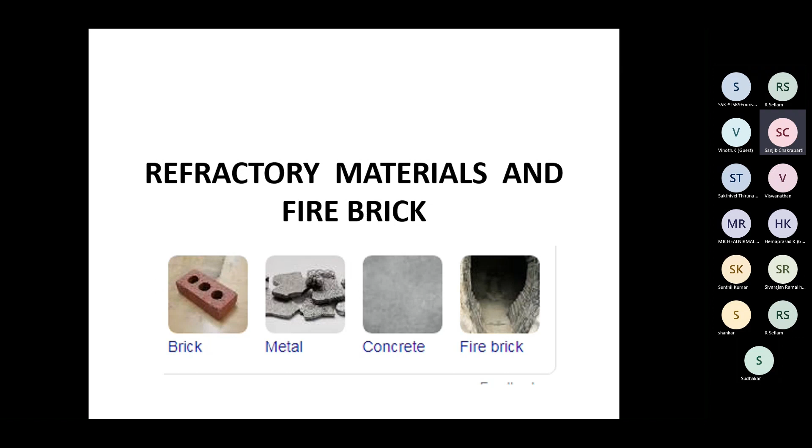So first, what are refractories and what are they used for? Refractory is a very hard material, used as a liner for chemical vessels, chemical process equipment, and furnaces. It is a very stable and particularly heat resistant material. When there is a heating furnace, you cover up the heat, you don't allow the heat to go away, so you don't waste the heat. It is chemically a very stable compound, mechanically hard, and very non-reactive to heat, chemical activity, chemical corrosion and erosion.

So it is basically a heat resistant and chemically resistant material, with certain features: low thermal conductivity and low electrical conductivity. The materials are mostly oxides, carbides, and nitrides of silicon, aluminum, magnesium, calcium, boron, chromium, and zirconium. These are some rare materials, and we are lucky that India has an abundance of them in the earth's crust, so we can extract them. These raw materials are minerals, and we process and use them.

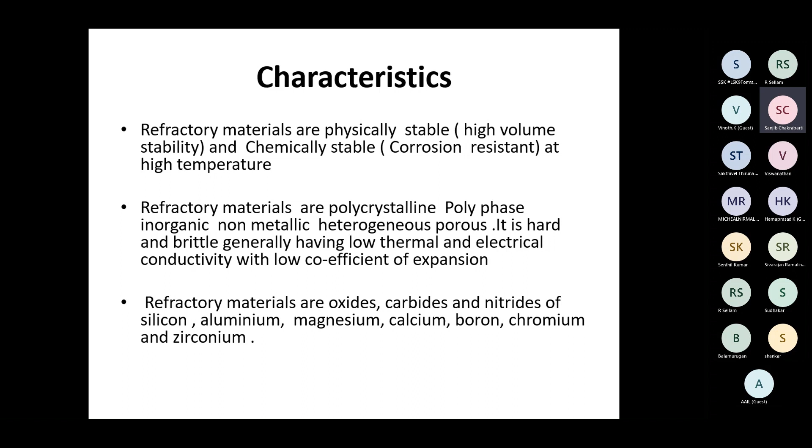So the use of refractory, just to elaborate. It is an insulating heating system. It insulates the heating system so that the heat is contained in the process and best utilized. It is used in all metallurgical processes, furnaces, kilns, reactors, even in the petrochemical industry, in the thermal industry, in your power sector also. It has very wide applications, of different kinds of variety.

And refractory is also used as a support system to the structure; normally it stops the heat being conveyed from the process to the structures and your environment. So it is called the insulating system. It is a kind of insulation to the other parts of the structure.

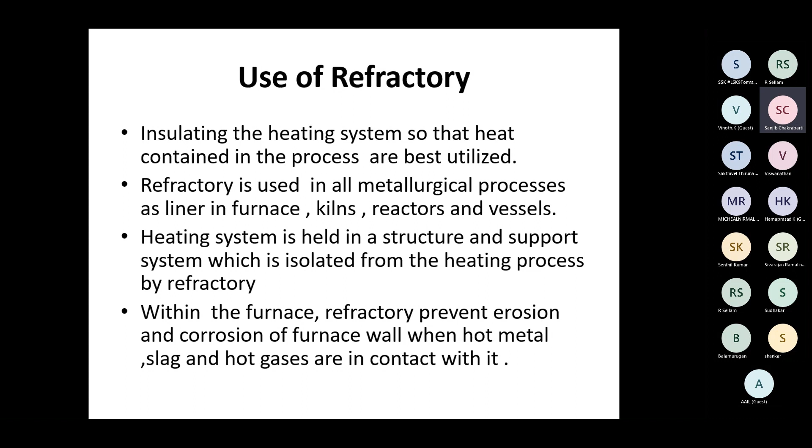So furnace refractory prevents corrosion and erosion within the furnace. Inside the furnace, say for a blast furnace or any cupola, the refractory is the layer which prevents corrosion and erosion of the furnace wall when the hot metal and slag are in contact with it. How is it characterized? The refractory materials are physically very stable, as I told you, and have high volume stability.

Use of refractory: the insulating, and other uses like heating elements. Conducting refractory is used for heating elements. Silicon carbide and tungsten are the heating elements in other chemical processes like the hydrogen reformer, ammonia primary and secondary reformer, cracking furnaces, catalytic cracking heaters, utility boilers, like this.

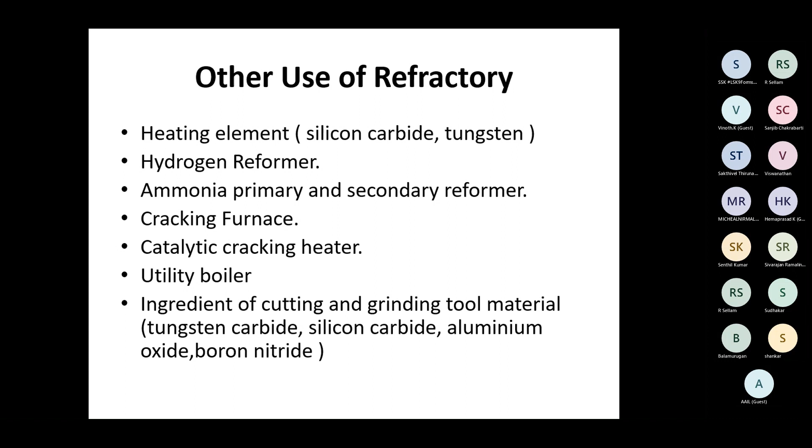So, the shape and size of a brick. There are different kinds of shapes and sizes of the brick. This is the formal shape, the standard shape, as per the American Society for Testing and Materials, your ASTM. These are the sizes: the straight refractory, arch refractory, wedge, key. These are the standard shapes.

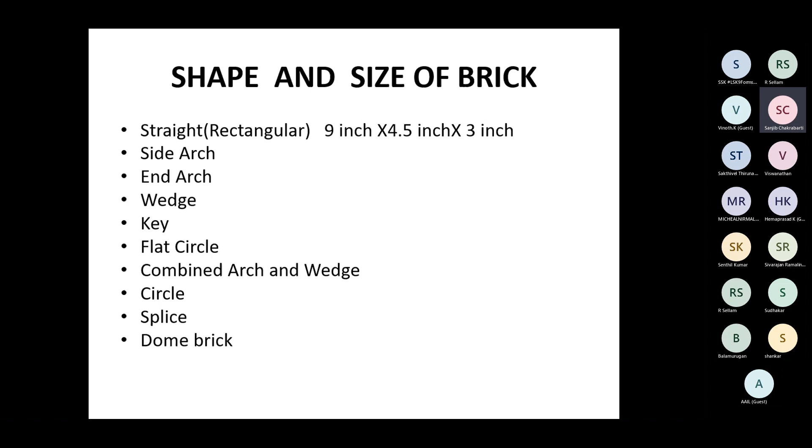Some of the standard shapes are like this. These are available, and these are molded products. They are not cut. These are molded products, and since refractory is a ceramic material, it's in a powdery form. You have to make it from powder by grinding. Different ingredients in the form of powders are mixed and molded.

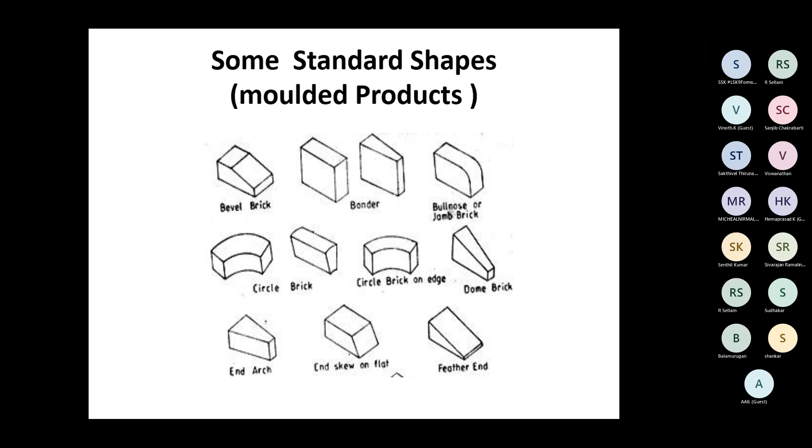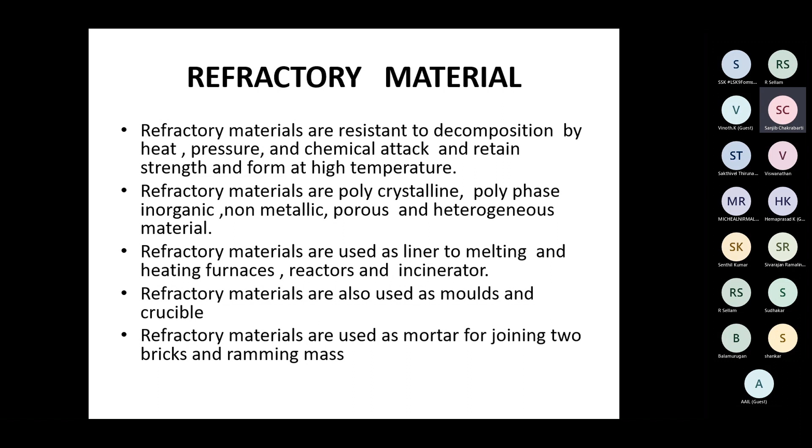Refractory materials are also used for liners of melting and heating furnaces, as I already told you, reactors, incinerators. Refractory materials are also used for molds and crucibles, or even glass and metal casting. Sometimes the material is a conducting refractory. We call them conducting refractories. We use carbide molds, your silicon carbides, graphite crucibles, silicon carbide molds, heating elements like this. These are the different kinds of usage other than lining material.

It is also used as a mortar, like in your construction work, like the plaster. We have to do the plastering, and mortar is used in joining two bricks. When we lay the bricks, it's used as a mortar, and that mortar is also a refractory material, ramming mass, etc.

So, what are the constituents? The natural refractory materials, like silica, are available in our earth's crust. You can get them in the earth's crust by digging to a level of 5-6 meters or 10 meters. Silica, alumina, fire clay, dolomite, bauxite, chromite, magnesite, zircon. These are all available, and India is quite rich in these materials.

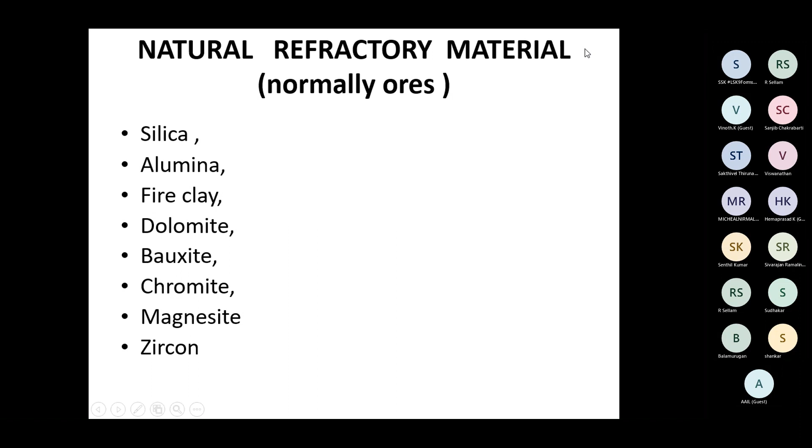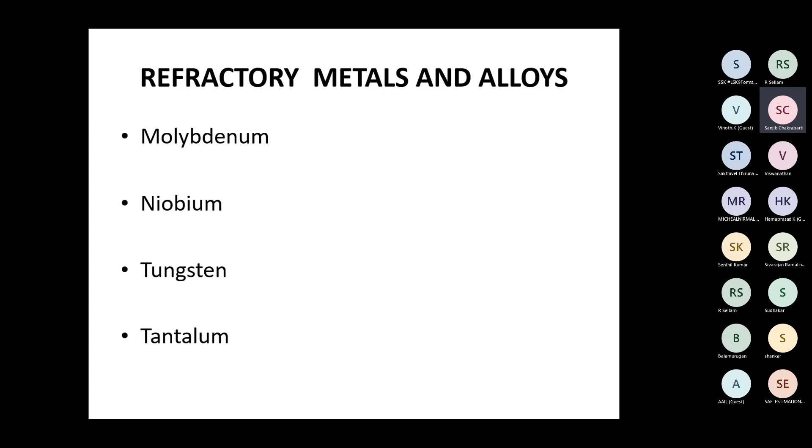And we have refractory metals and alloys, as I told you: molybdenum, niobium, tungsten, and tantalum. These metals conduct heat. But as refractories, they have very high heat resistance. These materials don't melt much; their melting point is quite high. So that is why it is a refractory material, but it conducts heat.

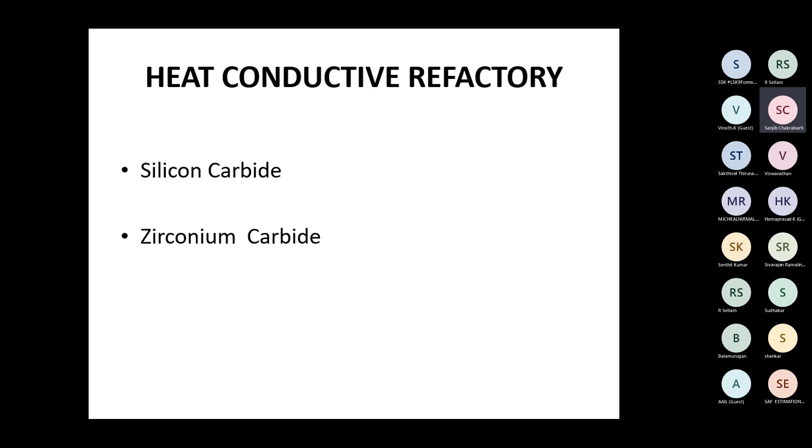These are the heat conductive refractories, as I told you, silicon carbide and zirconium carbide. And these are used quite heavily in high melting point situations. But the only constraint is that you cannot use any oxygen. Any oxygen cannot be used; you cannot allow the oxygen to pass in here.

So high temperature refractory, binary, ternary refractory. This is a high temperature refractory. Binary compounds such as tungsten carbide, boron nitride, hafnium carbide, a binary compound having a very high melting point, 3890 degrees centigrade. Ternary compounds such as tantalum hafnium carbide have one of the highest melting points, 4215 degrees centigrade.

Mind that these refractories are used in many ways in the space shuttle, spacecraft, the launching pad, where we have very high heat generation. Deflectors in the launching pad, where the gases are coming out. These are the deflectors that are used.

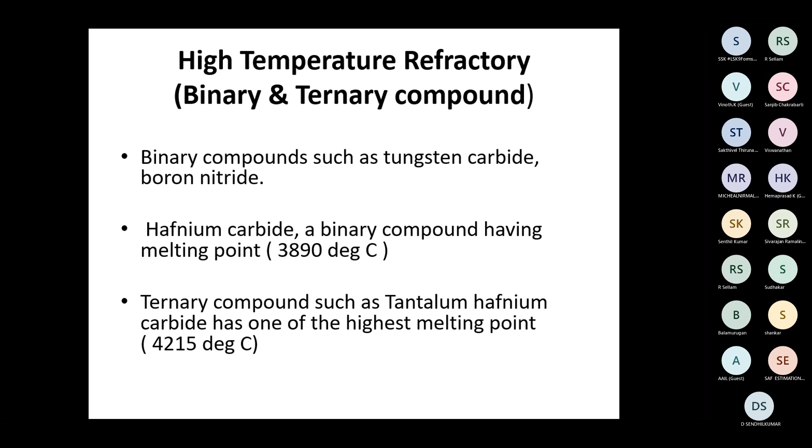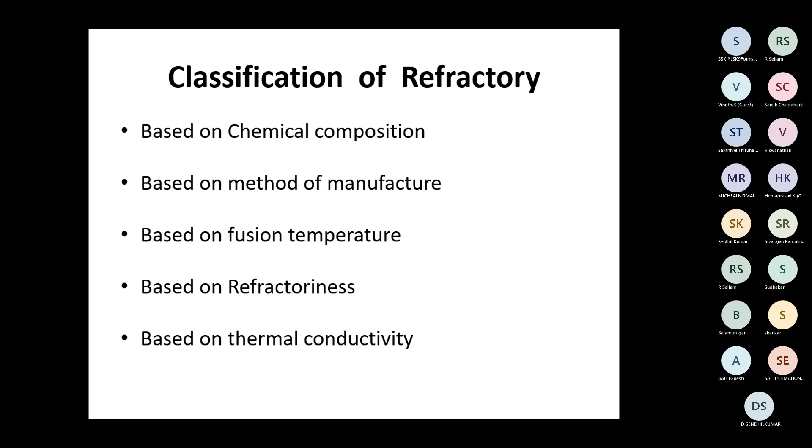So, classification of refractories. Refractories are classified on the basis of the following: chemical composition, method of manufacture, fusion temperature, refractoriness, and thermal conductivity. These are all the attributes for being a refractory material. And the classifications are as follows. First, we go to the chemical composition.

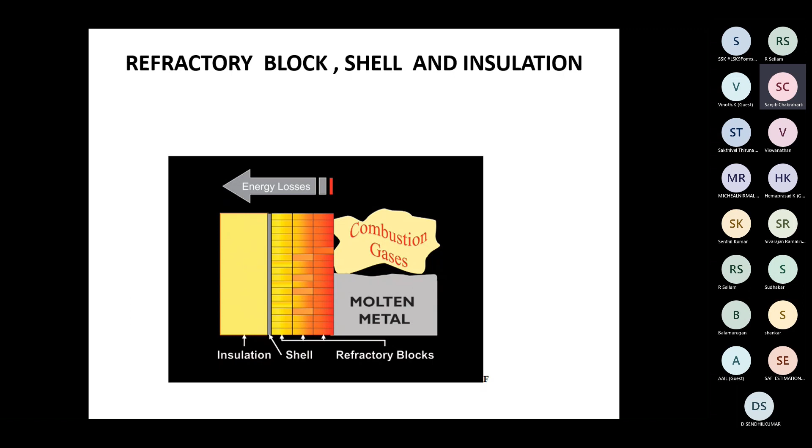Refractories based on chemical composition. There are types of refractories: acid refractory, basic refractory, and neutral refractory. The first is the acid refractory. Acid refractory is acidic in nature, and this refractory material reacts with or attacks the basic slag. When there is molten metal, slag floats on top of the surface.

So the basicity or acidity of the slag has to be determined before selecting the refractories. If you use the acid refractory, then you cannot use the basic slag. Or in a process where basic slag is generated, you cannot use the acid refractory. So you have to be very careful while selecting the refractory.

So what are the acid refractories? I am defining them here. The super duty refractory bricks: the lining of aluminium melting furnaces, rotary kilns, blast furnaces, hot metal transfer ladles. These are the super duty fire clay bricks. These are all acidic bricks.

And high duty fire clay bricks, I will explain. What are the high duty bricks? What are the super duty? The lining of cement and lime kilns, blast furnaces, incinerators.

Third is the high alumina bricks: boiler furnaces, spent acid regenerating furnaces, phosphate furnaces, glass tank refiners, carbon black furnaces, continuous casting tundish, we call it the concast machine, coal gasification reactor linings, and petroleum coke.

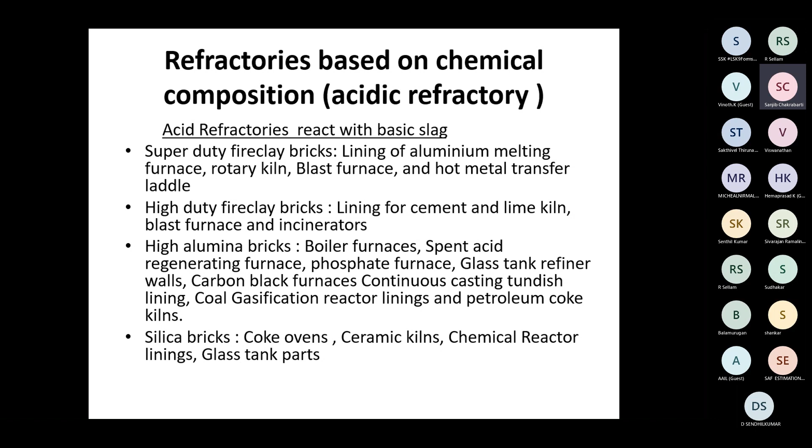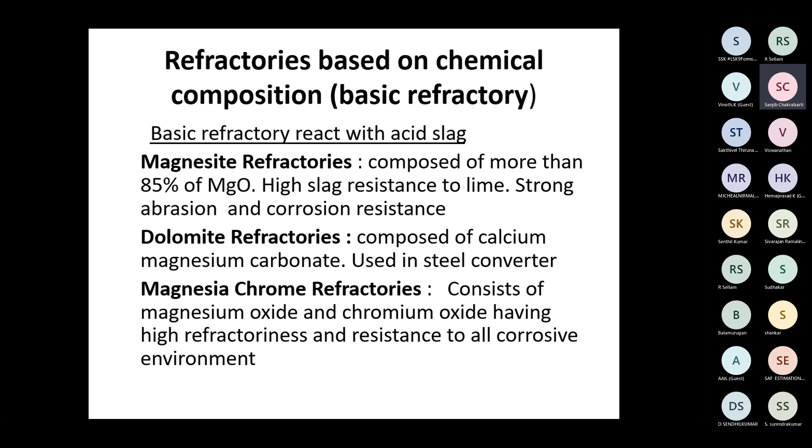Dolomite refractories are used quite considerably, and in aluminium extraction or aluminium melting these bricks are quite used. It's a costly brick, so it has strong abrasion and corrosion resistance, apart from the temperature. So these are the chromite and magnesite. There are other kinds of calcium bricks also.

Next is what we call the neutral refractory. This is the very peculiar nature of neutral refractory: they do not react; neither acidic nor basic slag attacks them.

The acidity of the slag or the basicity of the slag doesn't attack these refractories. And mainly, as an example, in your induction furnace we use the neutral refractories.

The carbon graphite refractories mainly work in reducing conditions. Mind that carbon graphite refractories are quite useful neutral refractories, but oxygen is the enemy of carbon graphite, because it will oxidize the carbon and the carbon dioxide will escape. All this will be jeopardized. So be very careful when you use carbon graphites. We have to use them in a reducing atmosphere.

Then chromite refractories, composed of sintered magnesia and chromia. They have constant volume at high temperature. This is a very good chromite refractory, a very costly refractory. The volume stability is very high for this refractory. Alumina refractories are composed of 50% alumina. High alumina refractory is not neutral. High alumina usually is an acidic refractory.

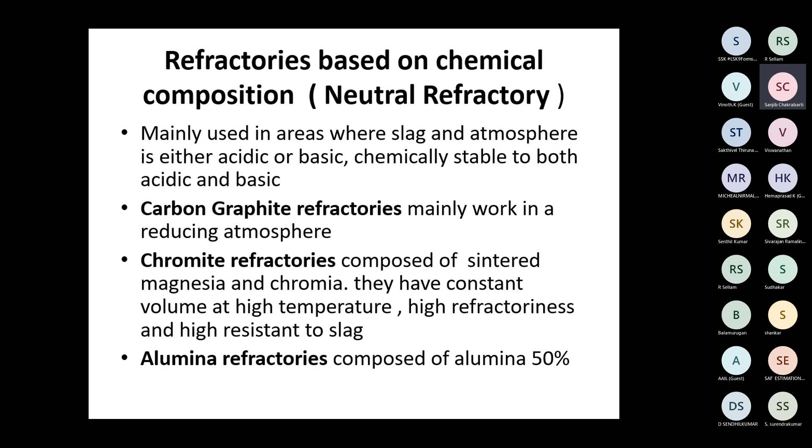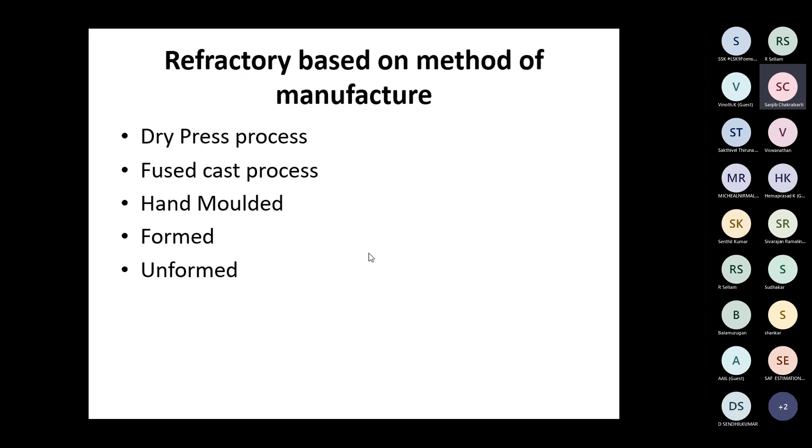And there's the fused cast process and molded process, formed, unformed. So there are different varieties. I'm not going into detail; we would need hours of lecture for them. I am switching to the next slide.

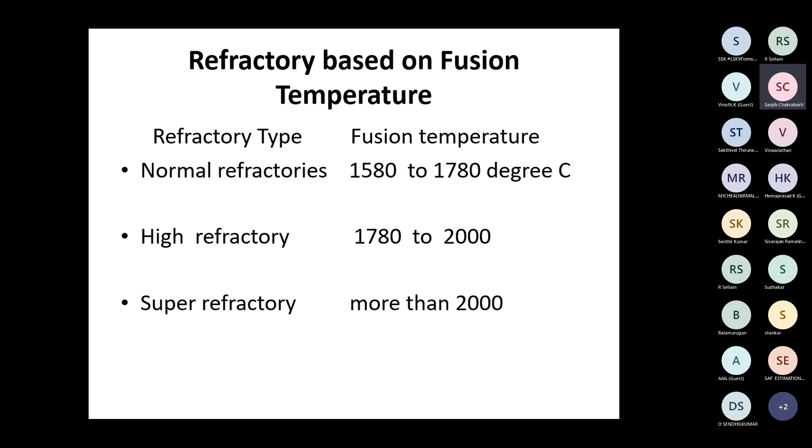Refractories based on fusion temperature. The normal refractories are 1580 to 1780. High refractories are 1780 to 2000. Super refractories, more than 2000. I will talk about these super refractories afterwards. Next is refractory properties. What are the refractory properties?

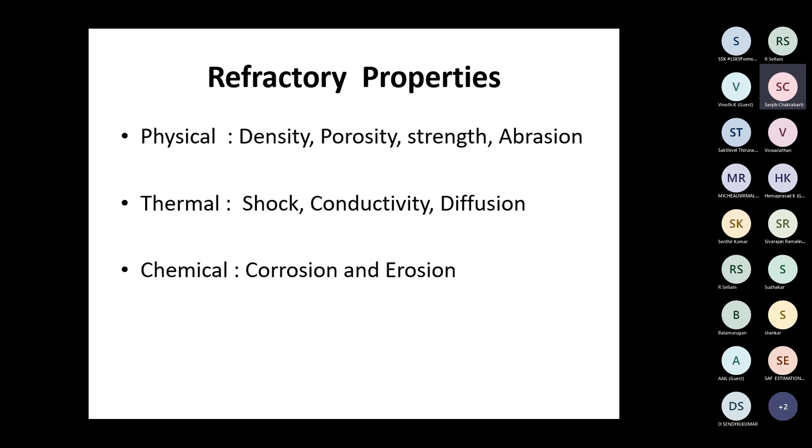The chemical composition is very important. Out of all properties, the most important are the corrosion and erosion properties. As I told you earlier, you have to prevent corrosion. When the hot metal is there, the hot slag should not corrode the refractory. So be very careful about the selection of the refractory vis-a-vis the hot metal and the slag used in the process.

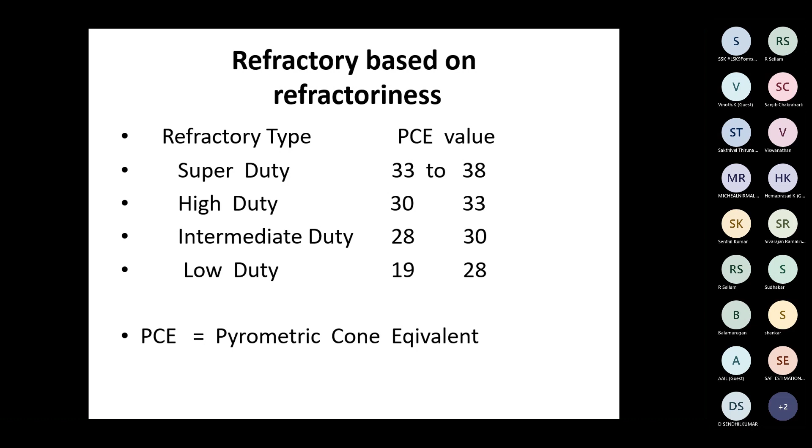Pyrometric cone: the thermal softening behavior of a refractory material is known as refractoriness, which is determined by the pyrometric cone equivalent, or PCE test. And it is done in a PCE furnace. PCE of a refractory material is about its ability to withstand elevated temperature without appreciable deformation. The PCE test compares ceramic specimens of known softening behavior, either in Orton or in Seger test.

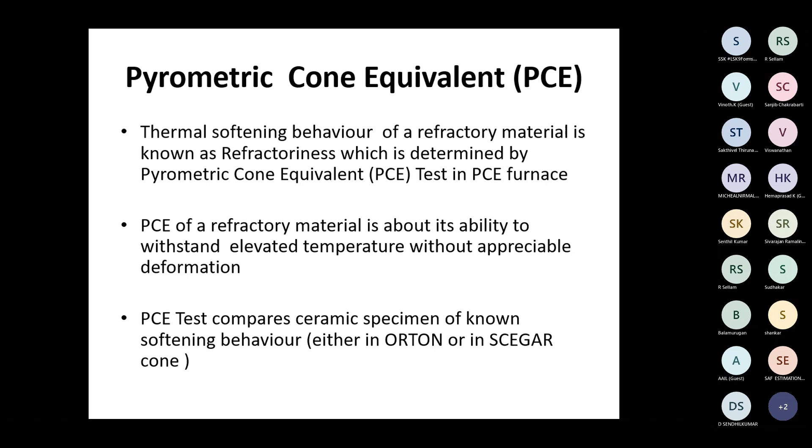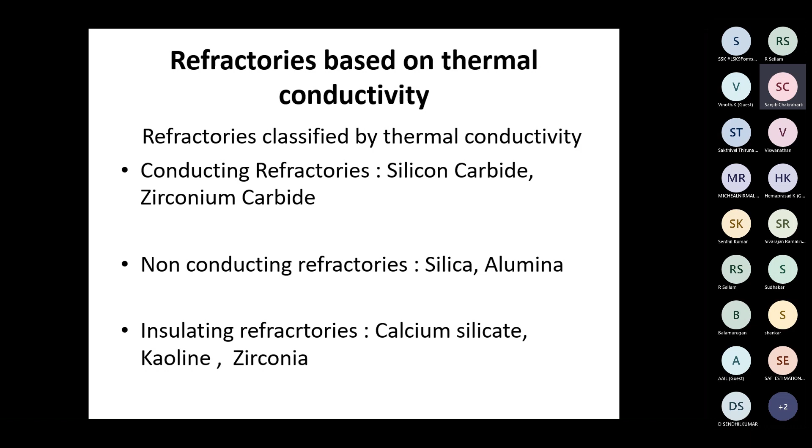Refractories based on thermal conductivity. The refractory is classified by thermal conductivity. Conducting refractory: silicon carbide, zirconium carbide is highly conductive refractory. Non-conducting refractory is silica and alumina. Insulating refractory is calcium silicate, kaolin, zirconia. Insulating is where the holes or the porosity is very high. Insulating refractory has to have quite good porosity, otherwise it will conduct.

Types of insulating refractory based on thermal conductivity. So the insulating refractory reduces the rate of heat loss through the furnace wall, which requires a high degree of porosity. Having a high degree of porosity, there are possibly 4 types. Heat resistant, with application temperature less than 1100. Refractory is less than 1400 degrees centigrade, high refractory less than 1700, ultra high refractory less than 2000.

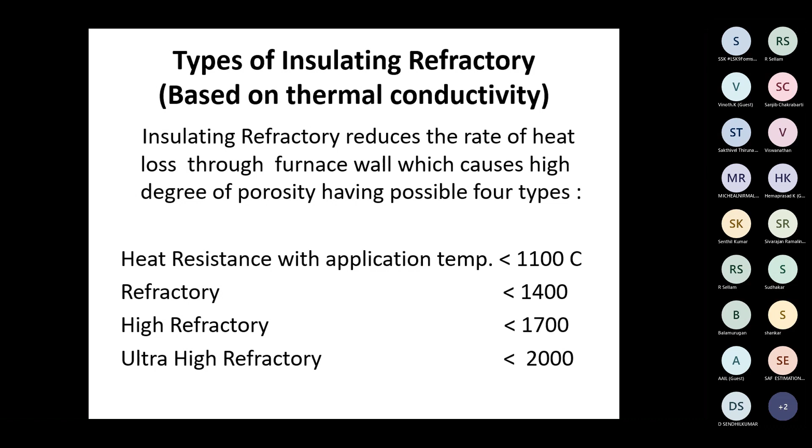So these are the broad types of refractory we handle in our engineering use, particularly the metal, iron and steel. Iron and steel use almost 70% of the refractory. Whatever I described, the iron and steel industry consumes 70%.

I was with RN Industries for many years in the steel plant, all these steel plants or mini steel plants or small refractory, particularly in the Odisha and Bihar area. I have seen a lot of applications. A lot of refractory units are there in Bihar. And Tata Refractory is a very good unit there at the Bihar Odisha border, and Jharkhand area. So these are all refractory. Almost 70% of this type of refractory is used in the steel industry.

So I just elaborate: fired refractory products, non-fired refractory products, special refractories, monolithic refractories, very useful, functional refractories, clay bricks, high alumina bricks, silica bricks, magnesite bricks, corundum bricks, ramming materials, plastic materials, casting materials. So these are all refractory materials. Whatever materials I have described earlier, the ingredients are from that.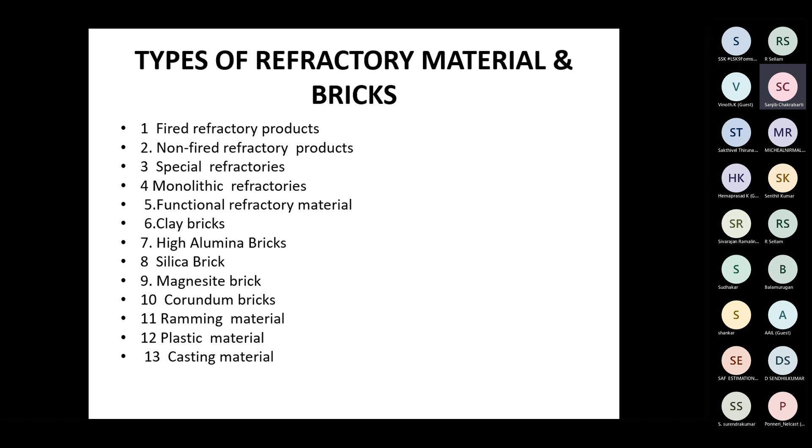Fired refractory is obtained by kneading, molding, drying, and high temperature firing of granular powder, raw materials, and binder. Fired refractory bricks are shaped. They are used in the wall, floor, and roof of a furnace. Whatever the furnace is, you have a wall, roof. These are shaped materials. They have a particular size, as I already showed you. The standard size is there. There are non-standard bricks, but non-standard bricks are very costly. You cannot afford them for your furnaces.

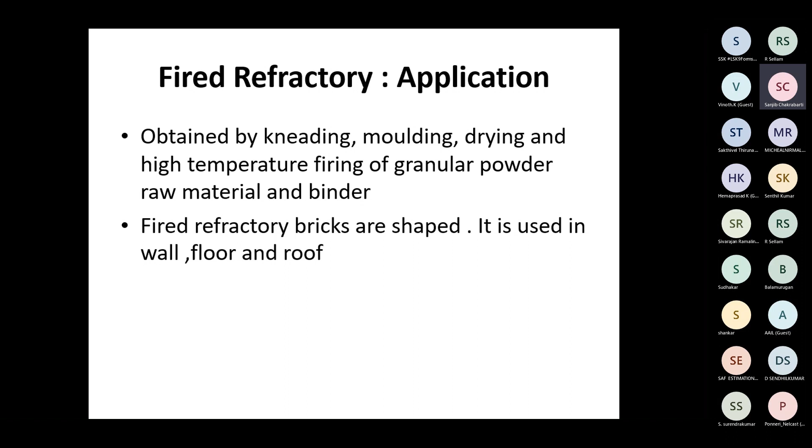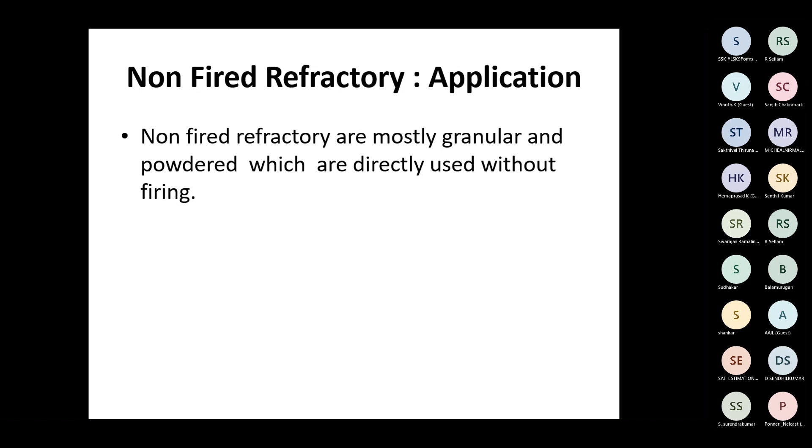Non-fired refractories are mostly granular and powdered, which are directly used without firing. Special refractories. Special refractory is a kind of refractory material with special features made of one or more high melting point oxides, refractory non-oxides, and carbon.

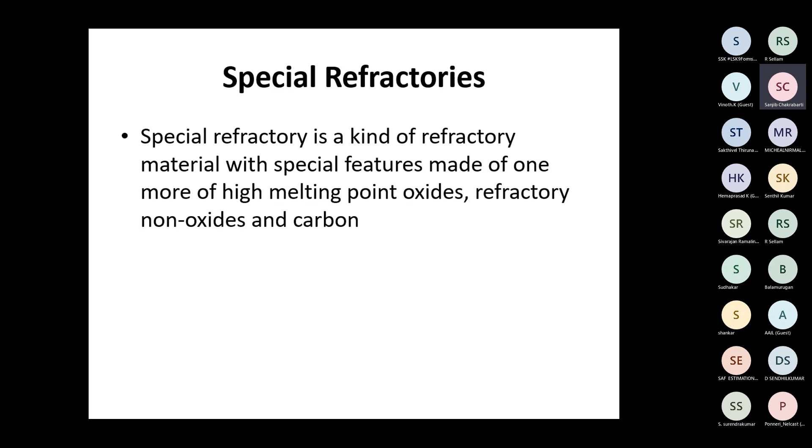Monolithic refractory is very useful. Monolithic refractory is a bulk refractory concrete, we call it, because in the industry a lot of unformed refractories are used. Monolithic refractories refer to refractory materials with a reasonable gradation of granular powder, refractory raw materials, binders and various admixtures that are not fired at high temperature and used directly after mixing, molding, and grilling. It is not fired, but grilled.

Like we grill our sandwich before eating. It is not fired. Then who does the firing? The furnace does the firing. The site does the firing itself. The process does the firing. So it gets its strength by firing inside the process, not before that.

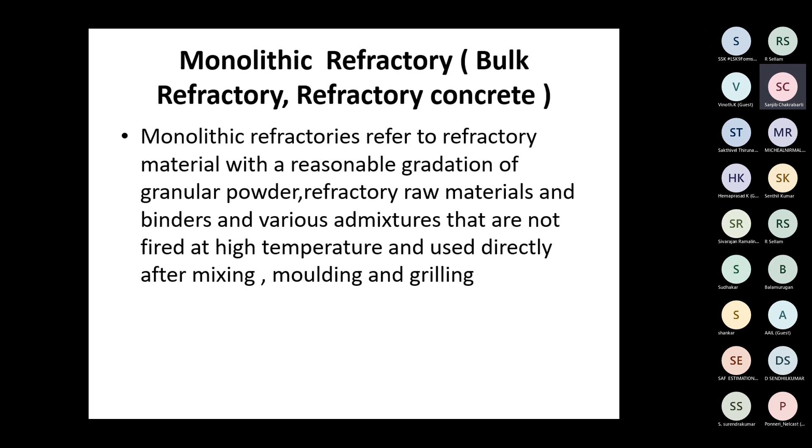The functional refractory is fired and non-fired refractory materials that are mixed with powdered and granulated refractory raw materials and binders to form a certain shape and have special melting applications. These are all functional refractories. You can do the refractory as per your functions. The use of refractory is as per your function, as the system or the process desires. So you can mix it, admix it, and do it.

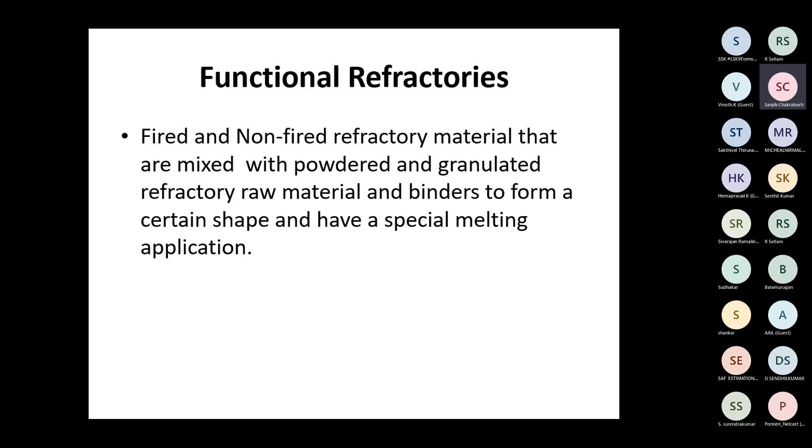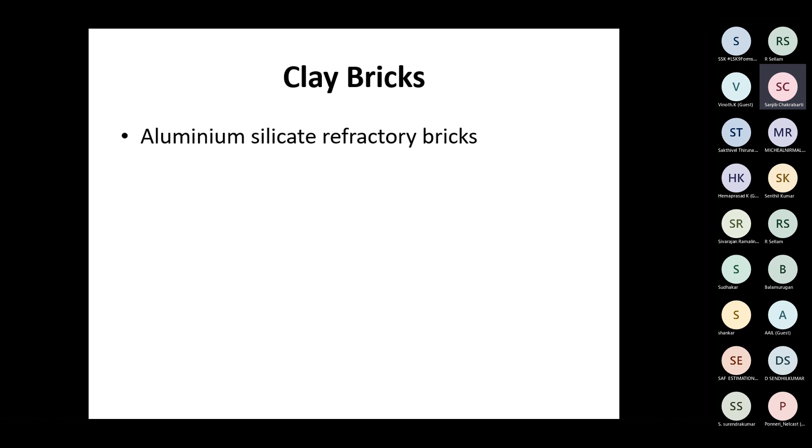The clay bricks are aluminum silicate refractory bricks, called clay bricks. I'll skip some things like high alumina bricks, silica bricks, magnesite bricks, corundum bricks, ramming material.

Types of industrial refractory material: acidic refractory material is different. You can have silica, fire clay, or high alumina. Your normal alumina bricks are neutral bricks, but high alumina bricks are acidic bricks.

High alumina bricks are costly bricks that can take quite high temperatures. They can resist high temperature with 50 to 99% alumina content.

Silica refractory brick is very commonly used. Fire clay refractory, like in a cupola, you can use quite a lot of fire clay refractory bricks. The basic refractories are magnesite brick, lime, and similar materials.

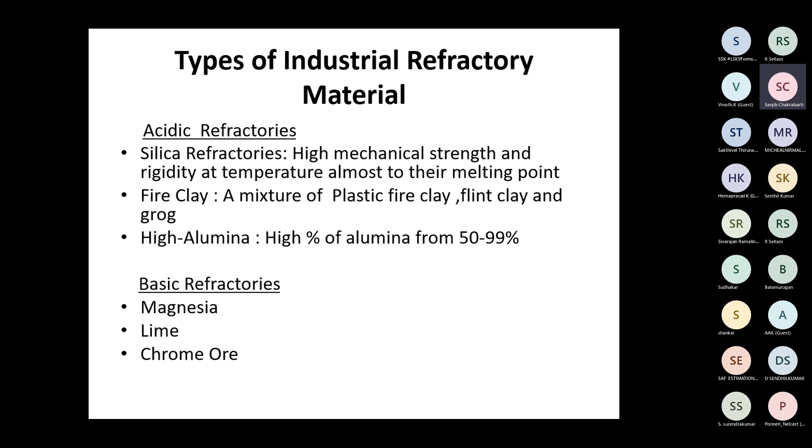The composition and application of some acidic refractory bricks - this shows the composition, the acid type. By changing the composition, changing the alumina percentage, you increase the high temperature resistance. You can classify high temperature alumina bricks by increasing the alumina percentage.

So it's a very costly brick. High alumina bricks are quite costly bricks.

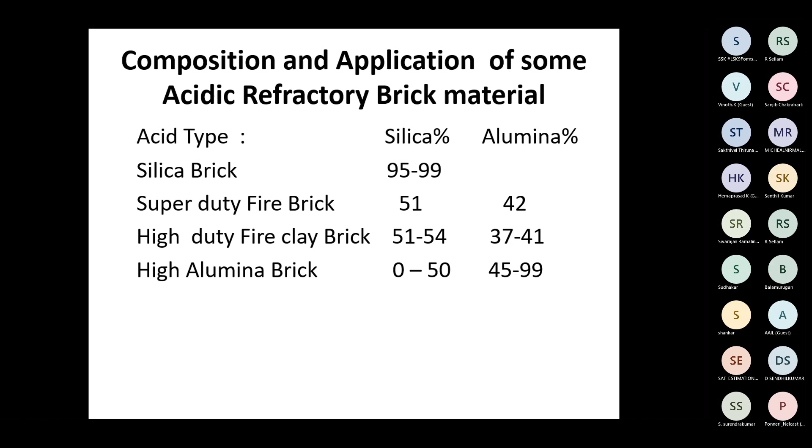Next is the use of refractory liner in iron and steel industries - refractory bricks and liners used in steel plants. This may not be of interest to all of you, maybe only 1-2 units or the foundrymen, but it's relevant to the overall iron industry because I cannot skip the coke oven.

Coke oven is the ingredient where you get the coke, which feeds your foundry. I cannot skip the blast furnace either - blast furnace gives the pig iron. We cannot eliminate the blast furnace. If you don't get pig iron, you cannot run your cupola. So these are all integrated.

Here you will find these are all real iron and steel industries, the bulk of this thing, and some other aspects as well.

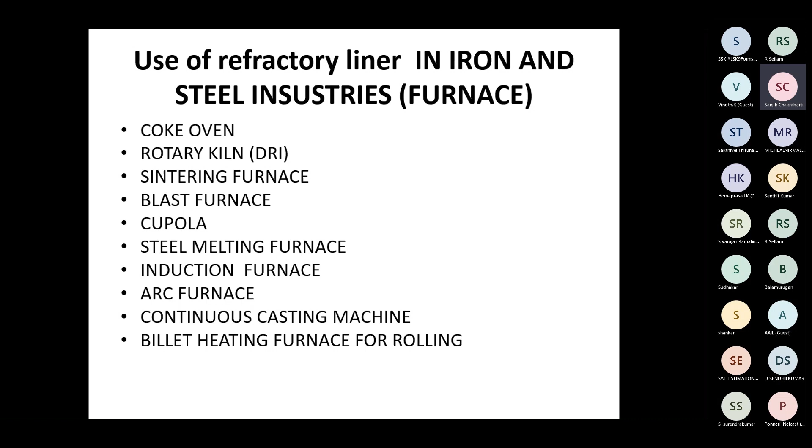Application of acidic refractory: super duty fire clay bricks - lining of these I already told you - used for aluminum melting furnace, rotary kiln, blast furnace. High duty fire clay bricks used for lining of ceramic, cement industries. Cement industry has quite a refractory requirement because of their rotary furnace, rotary kiln.

High alumina bricks used for boiler furnaces, spent acid regenerating furnace, phosphate glass tank refiner, carbon black furnaces, continuous casting, petroleum coke kilns, like silica bricks. Basic magnesite bricks, as I told you, and the basic oxygen furnace is a huge requirement of basic refractories for steel plants. Your basic oxygen process, BOF or BOP, basic oxygen furnace, we call these converters.

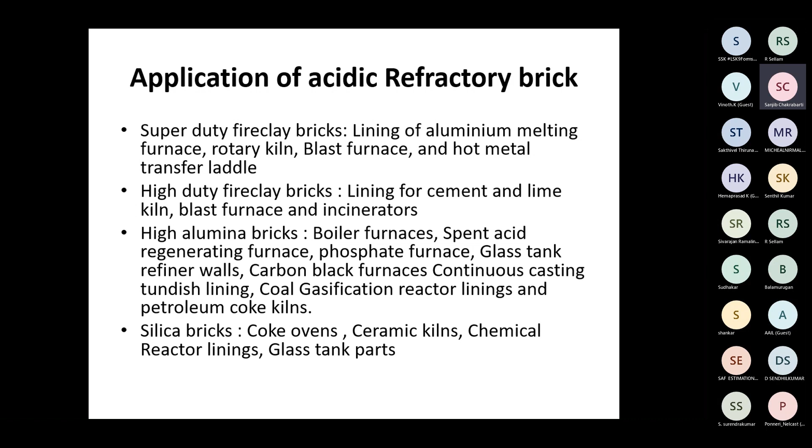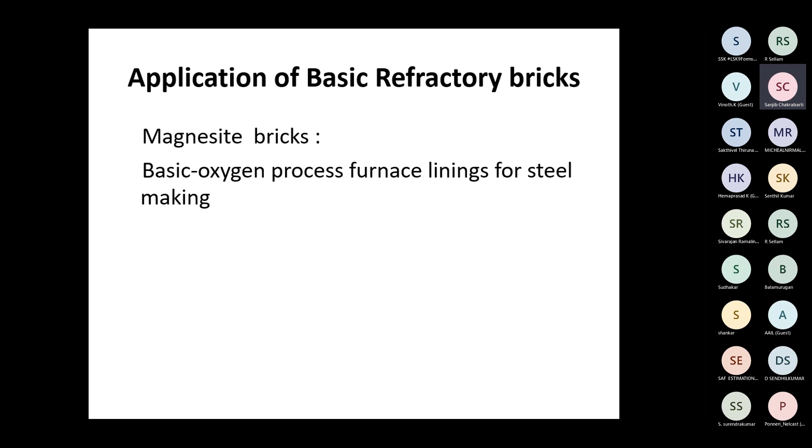Now let's switch to basic - next slide, application of basic refractory bricks. It's called the magnesite brick, used for basic oxygen process furnace lining for steel making.

I have explained where this type of refractory bricks are used in steel plants - these are used where there's a coke oven, silica bricks, rotary kiln, super duty fire clay bricks, rotary kilns in the DRI or sponge iron.

You find plenty of these if you go to the Odisha belt, Jharkhand, even in the Raipur area - you'll find quite a number of rotary kilns for sponge iron production. Sponge iron is the main ingredient for your steel plant. Many steel plants need sponge iron, you can't run a mini steel plant without it. But an integrated steel plant doesn't need sponge iron.

Sintering surface, sintering furnace in the integrated steel plant uses silica bricks; blast furnace uses super duty fire clay bricks; cupola uses alumina bricks. You can use alumina bricks, and fire clay bricks also can be used.

Steel melting furnace - typically, out of all furnaces, you will find only magnesite bricks are used because it's a basic process. In the basic process you cannot use acidic bricks - any other bricks cannot be used here, or the whole furnace will be in disorder.

So proper selection and use of refractory is very important, because otherwise your furnace efficiency will go down, and costly energy will be wasted.

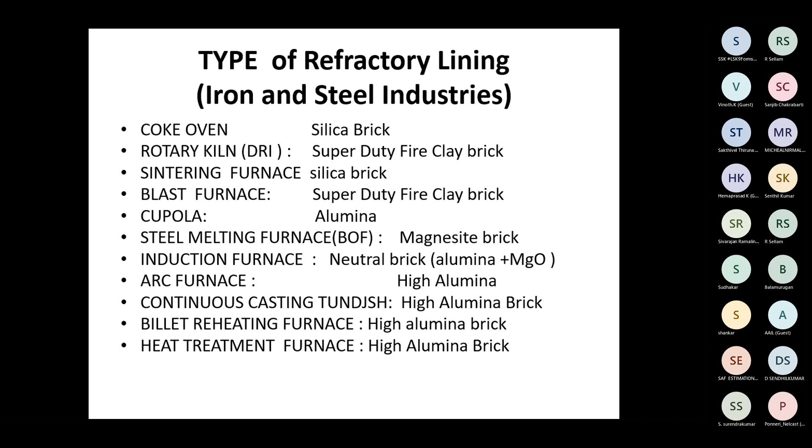Next is the failure of brick. When refractory bricks fail, a lot of theories, articles, and research papers are there, but I am just giving a few tips here.

Even a blast furnace has different zones at different temperatures. At the top zone where charging happens, the refractories are subjected to mechanical fracture and wear because materials are falling there, and combustion gases are moving up. The refractories are subjected to falling materials, impact, breakage, and abrasion. These are all mechanical fractures.

The fracture strength of the brick has to be high. Though we have already discussed that the strength of the brick doesn't have much tensile load, tensile load is not much, so we are weak in tension, but strong in compression.

For thermal reasons, thermal fracture, there is spalling caused by irregular contraction and expansion from quick heating and cooling cycles. A refractory brick is subjected to this not only in the steel plant but in many other things, particularly heat treatment plants where there are heat treatments. During thermal cycling, cooling and heating cycles, the brick has to withstand this cycle. Otherwise, there is spalling and breakage.

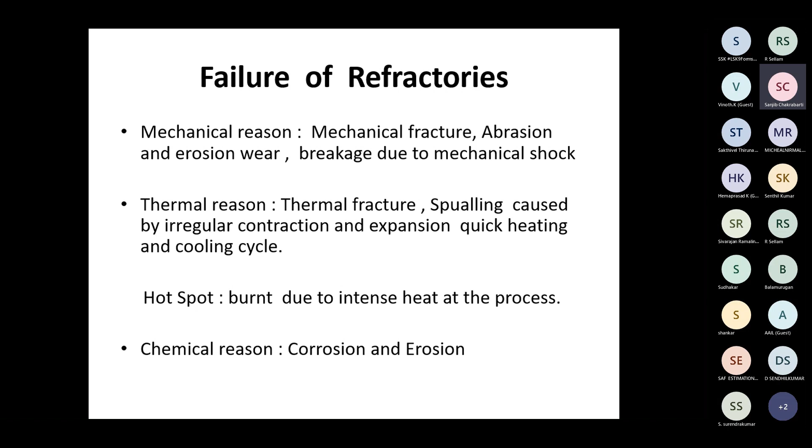Mechanical failure - the mechanical strength of the refractories indicates the resistance to mechanical fracture. Refractory bricks are made of aggregates, and strength varies from 4 megapascal to 10 megapascal due to size and aggregate distribution. So the distribution is very important, as it is not a homogeneous material, it's a heterogeneous material.

Refractory bricks are a heterogeneous material - there's no homogeneity because they are made of powders, aggregates, and dust. Some particles are slightly bigger, some smaller, and due to this irregularity in distribution, the strength changes from 4 megapascal to 10 megapascal.

We must be very careful, because a very strong refractory brick is not desired - if the strength increases, it will be subjected to fracture. So it is the fracture strength that has to be increased, not the mechanical strength.

Silica bricks are more susceptible to breakage with intense heat due to grain growth at the boundary. In the foundry, the presence of silica causes formation of grain boundaries, and fracture happens at these grain boundaries. So you have to be very careful about deciding or choosing the proper refractory for the proper use.

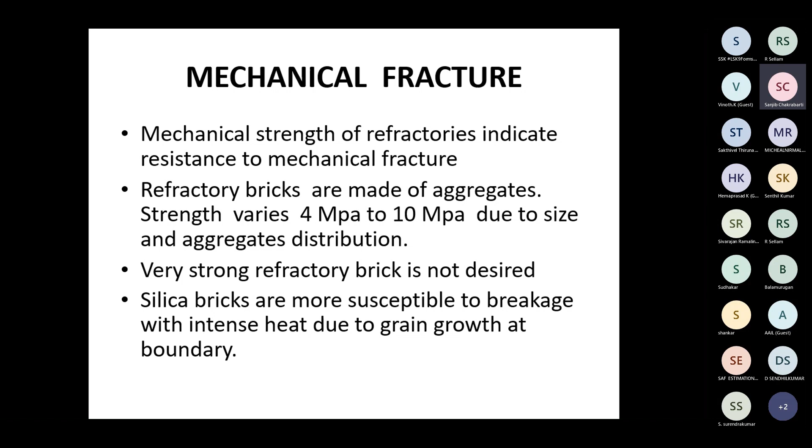Second is the load displacement graph. This is a normal, very standard graph here. You will find a slanted line - the right side is called the tougher line, and the left side is called the brittle line. So we want the tougher side.

We want to select a tougher line so that there will be marginal displacement with strong strength. We want strength, not brittleness - we want toughness rather than hardness. If it is hard, it is brittle; if it's tough, it can absorb strength, it can absorb shock. That is our objective in selecting.

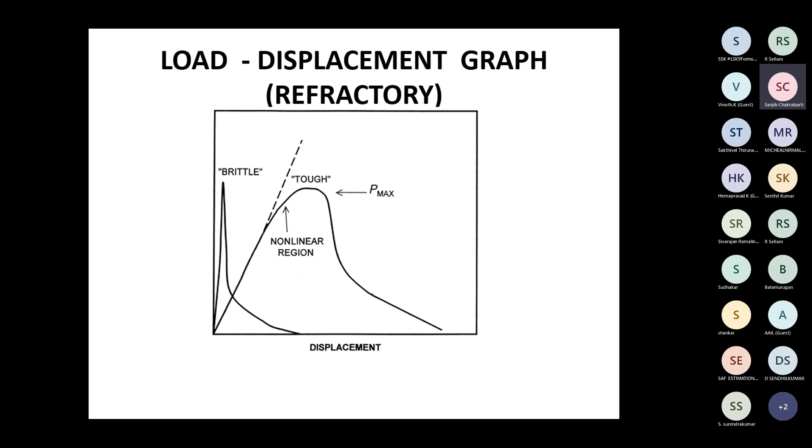The chemical reason of failure of refractory - the significant cause of refractory failure is due to slag corrosion and erosion of refractory. These are the main causes of refractory damage. Out of all reasons, this is the biggest cause of refractory failure: corrosion and erosion of refractory.

Slag corrosion is caused by improper selection of refractory material for the chemical process. Acidic slag will attack basic refractory, and basic slag will attack acid refractories.

So there is a test for that - B is the basicity by acidity. This test of slag is needed for refractory selection, where B is CaO and A is silica. So calcium divided by silica - these are the ratios needed for refractory selection.

When B by A is near 0.25, it's acid - you select acid refractory. When B by A is near 0.75, it's basic refractory. If it is in between, go for neutral refractory. This is the thumb rule for selection of the type of refractory used.

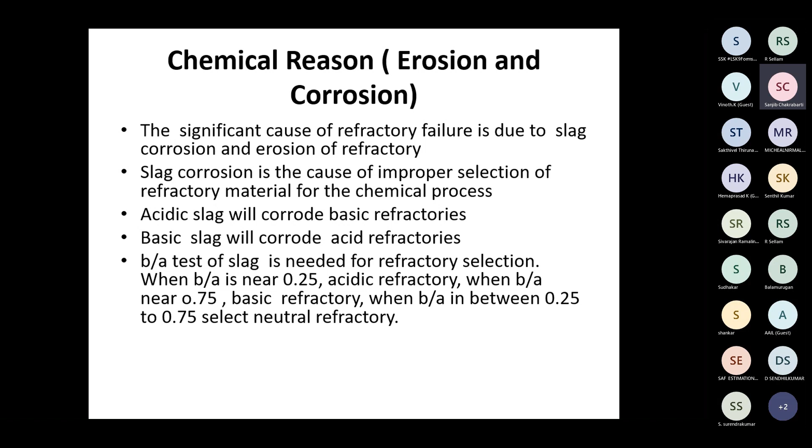So let me define a furnace - this is just academic. I define a furnace as an enclosure where energy in non-thermal form is converted into heat, and we conserve the heat, preserve the heat, and use the heating properly so it should be energy efficient. The furnace has to be energy efficient. Whosoever designs the furnace has to look at energy efficiency, because today energy cost is so high.

You have to conserve the energy - that way refractory plays a big role. Heating only for solid phase is heat treatment and reheating furnaces. Heating for melting includes...

cupola, induction, and arc furnace. Mind that cupola, induction, arc furnace is not the reduction furnace or process - it is just heating the process. The smelting furnace, where the ore is to be reduced, is a reduction furnace.

The blast furnace is the king of all furnaces - the king of all furnaces in the steel and iron industries.

The melting point I have derived because it's very important to know the melting points of metals, because mostly we do iron and steel industry - it's 93% of the world's metals consumption is iron and steel, as per information from USA. Whatever we consume iron and steel in the world, 93% is iron and steel, 5% is aluminium - so you know the importance of aluminium and steel. The rest is all other metals.

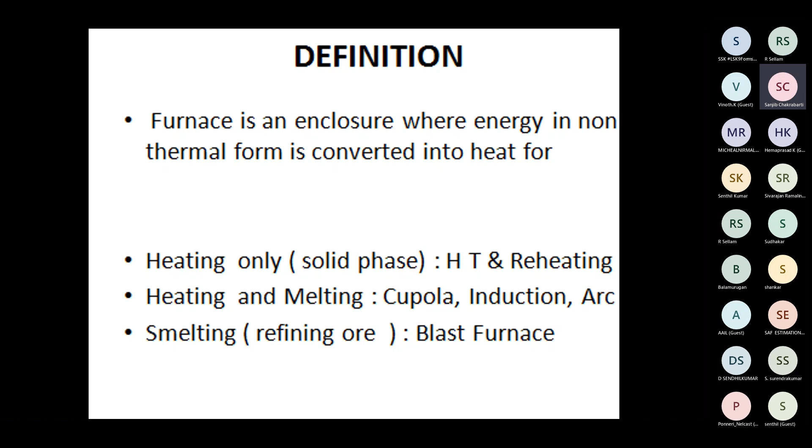The upper side is a reddish color because the temperature is less. Lower side, the emission or radiation is different - from radiation pyrometry, the lower side is whitish because the temperature is very high. So when it's this high, the lower zone where the hot metal is, faces the most severe conditions from the refractory.

The severity has to be judged, and you have to select the refractory accordingly. So you have all options - the severity has to be judged. Whether you are the refractory designer, supplier, or contractor - particularly the refractory contractor has to know all these things, which one to select, and they are quite qualified and suitable for the purpose. The lower side is a hot furnace where the temperature is very high, and all these things are to be used accordingly.

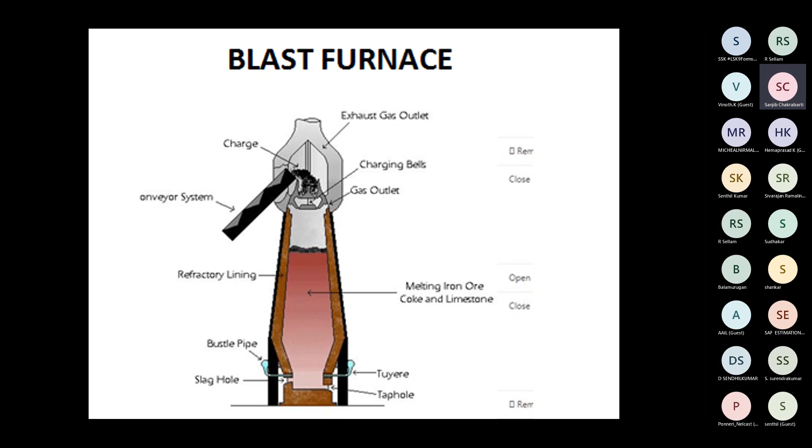Next is the coke oven battery. Being very much a steel plant man, coke oven is a very important area. Mind that this is very important in the sense that we use coal - not only do we use coal and convert it into coke, but by the process we get lots of byproducts. It's very rich byproducts, very costly and rich byproducts. And the coke oven gas is very costly - the coke oven gas almost balances all the gas. There's a gas circuit in the steel plant.

The pusher that pushes the coal and the coke. The hot chunk of material comes to here and is being sprayed and then is used and transported to the bunker. This is the coke oven battery, and this is the series of batteries. This is the lengthy, long series of batteries, coke oven batteries.

If you go to any integrated steel plants, not many in numbers, 8-10 numbers in there, you will find this is the starting point of a steel plant, where silos are there for the raw coal, or the tipplers are there from the wagon, and they tipple it to the silos, dump it here, the coke oven process. This is this lengthy, like the cabinet, or like a rack in your library. It looks like a rack in your library, but it is all the coke oven furnaces, the coke oven battery.

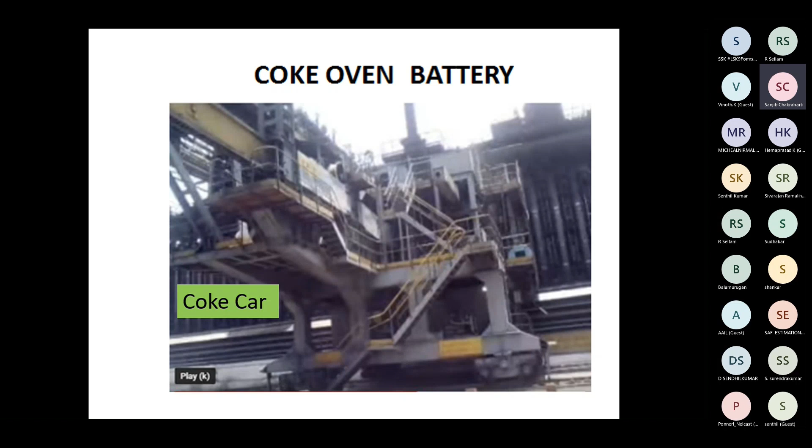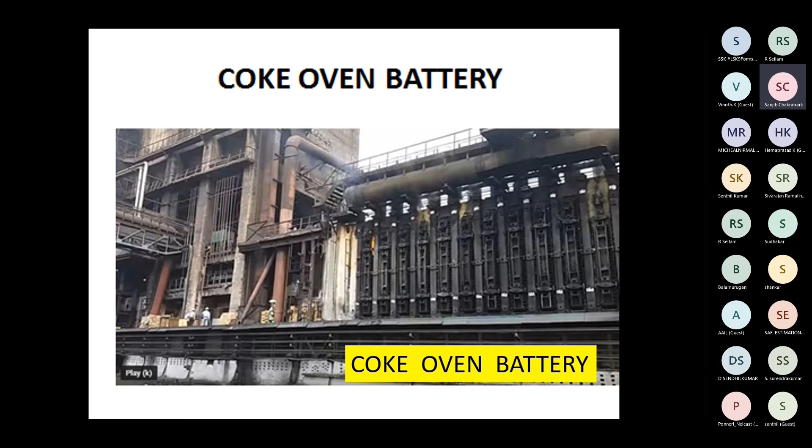This is called the rotary kiln. This is for sponge iron. You can have cement. You have the calcined coke. Your coke or coal or your limestone can be calcined. All this, where the calcination. Even the magnesite or the dolomite has to be calcined.

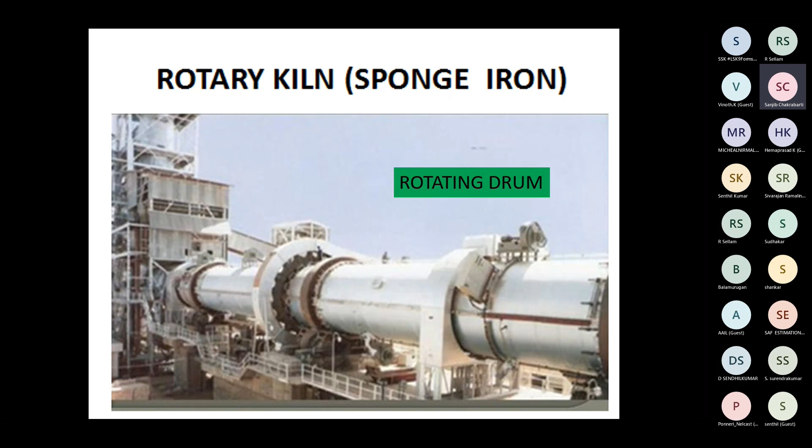So this is the refractory or the sponge iron. These are all rotary kilns. We call them rotary kilns because they are rotating. Very slow, 5-6 rotations per minute, but the diameter is maybe 3-4 meters, as long as 80. Next, please. This is also a rotary kiln.

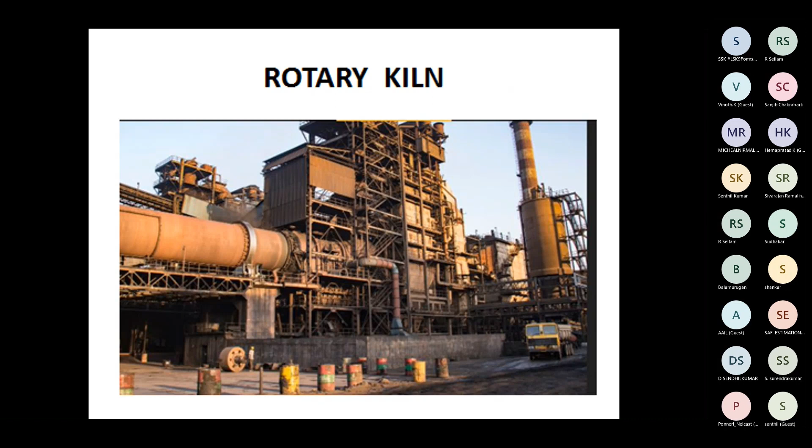The door is there. You can open the door. It's an intermittent furnace. It can operate in a day. But unlike the blast furnace, which you have to run for the entire year, except the capital repair. Mind that the blast furnace runs 24/7 for an entire year, except the 13 or 14 days they give for capital repairs of the lining, brick. But the cupola, on the other hand, is a heating furnace, just for heating and adding carbon to the hot metal.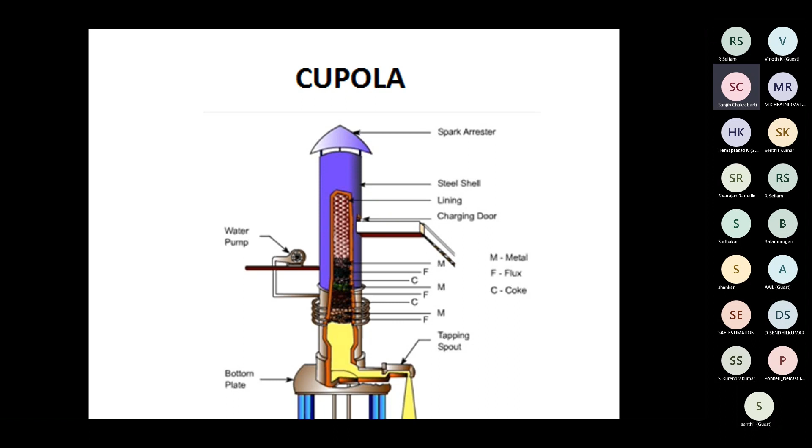So there's a slag door and the charging door, and you can charge it. Inside all the liners are there, and the principal things are the same. The bottom of the hearth is the high temperature zone, and there is a similitude of the cupola and the blast furnace in the sense they are very tall. But for the blast furnace we measure the volume capacity, while in the cupola it's tonnage capacity, 10 ton, 20 ton, 30 ton. In the blast furnace we measure the capacity by 2000 meter cube volume, and in one tapping, the entire material will come out.

So this is the LD converter. This is a very useful converter. The LD converter is for the steel plant, where the material from the blast furnace is used for reduction of the carbon, from around 4% to 0.12, 0.13, depending on the situation. So here you see the picture of oxygen lancing, where you are giving in the oxygen.

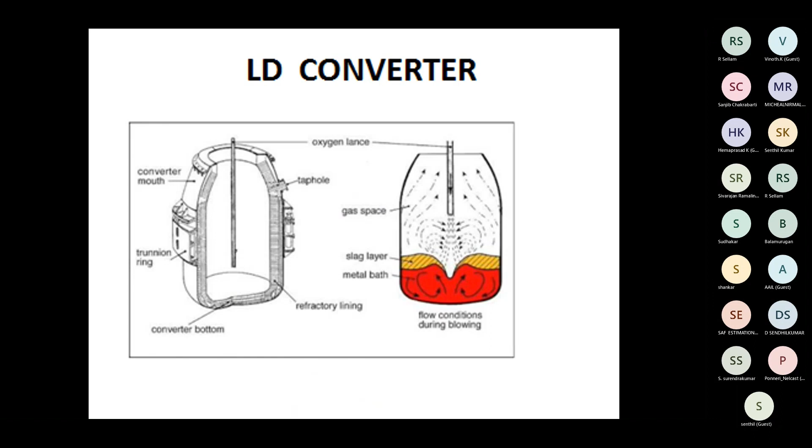So this oxygen is being supplied here, and mind that these are all basic slag. Only here, the liners of basic refractory are being used, the basic oxygen process. So these are the other parts I'm going to. These are of lower importance because the rolled material is rolled after the billet reheating furnace. It's very useful for the rolling mill, where you can have a furnace for billet heating.

This is not a very high temperature furnace. It is at recrystallization temperature, around 800, 900 degrees, because the cold billets are to be reheated. Sometimes the heated billet comes here and is rolled. So the temperature is not much, whereas in the blast furnace, the temperature is around 1600 degrees.

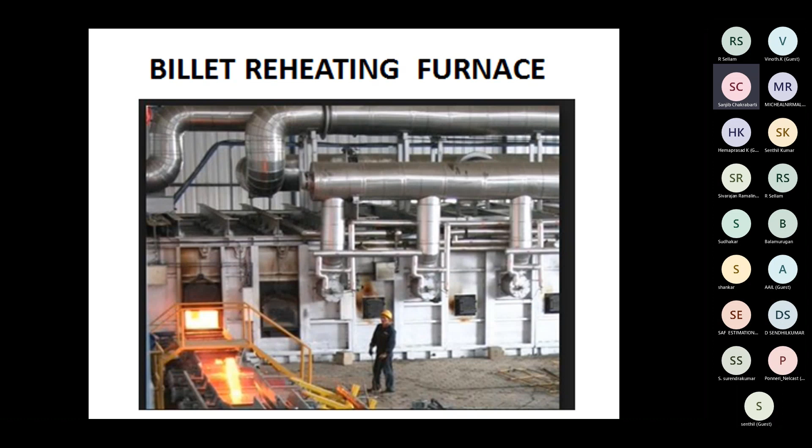So temperature is a very important parameter for selecting the refractory, along with the atmosphere. These two parameters are very important in selecting the refractory: temperature, and the atmosphere, whether acidic or basic. So these are the two proper guidelines for selecting it. So here, the reheating furnace.

Now the basis for selection: as I was talking about, the thermal requirement, the temperature; physical properties, mechanical; third is corrosion; fourth is installation logistics. Logistics is very important. How will you do it?

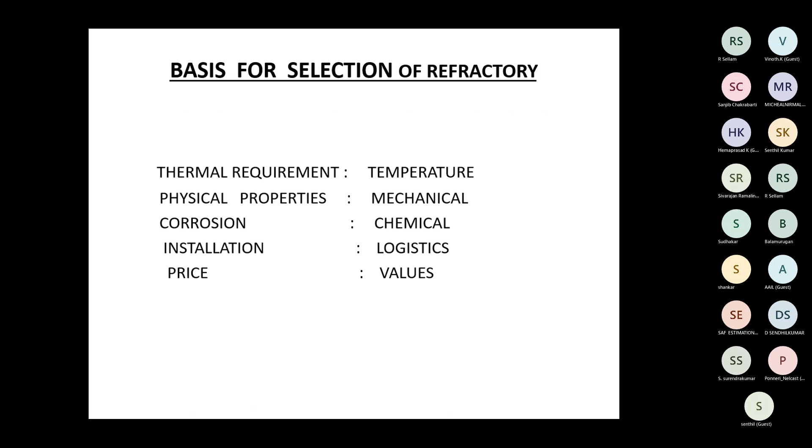I can give you an example: an LD converter of 150 ton capacity requires 6 crore rupees for replacement of its refractory. It takes a huge time, and you have to lay all the joints. And it can cover around 850 heats. One heat is around 2 hours to make your pig iron into steel. These are the statistics of the steel plant.

So these are the parameters for how you select a refractory: physical properties and so on. Refractory manufacturing is very important. How do you manufacture refractory? I told you it is a ceramic material, so it is a powder metallurgy technology. You have to make it powder first.

Normally the refractory starts from 1000 degrees Fahrenheit, but there are upper limits for this. It starts from 538 degrees centigrade. We can call a material a refractory if it withstands 538 degrees centigrade. There are two types: clay and non-clay type refractory.

One is clay, made of hydrated silicate of aluminium or alumina: kaolin, ball clay, bentonite, normal clay, etc. Non-clay types are alumina, silica, mullite, chromite. These are made from minerals, by crushing the minerals. Before crushing, sometimes we have to calcine them.

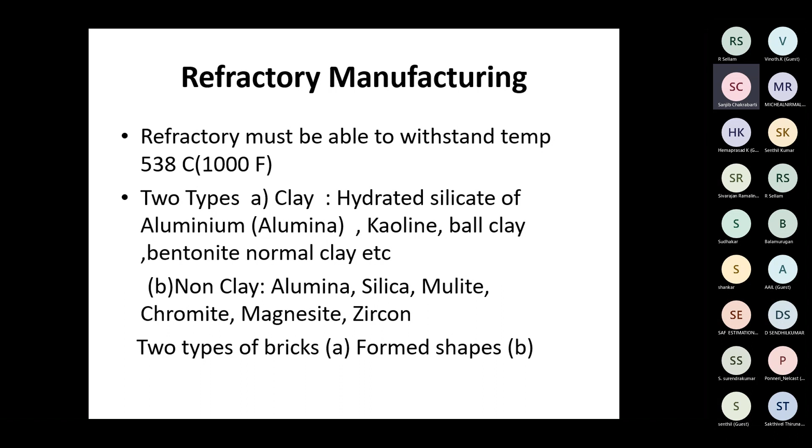We have to calcine it, converting magnesium carbonate into magnesium oxide, calcium carbonate to calcium oxide. So there we have a calcination furnace. For the calcination process, these furnaces are normally rotary furnaces. Two types of bricks are formed: shaped and unshaped.

So what are the processes there? Raw material grinding. I'm not adding calcining here, but before grinding, you have to calcine it. Grinding: you can have a ball mill, or you can have a pan mill. Screening: vibrating screens are there. If you visit Tata Refractories or Dalmia Refractories, you find all these processes there.

Tata doesn't have its own refractory plants. The public sector steel plants have their own refractory plants. Mind that. All public sector plants have their own refractory plants inside their unit. Tata doesn't make it inside its own unit. They purchase it as a bought-out item from other sources, and that too is from the Tata organization.

Screening is a screen for particular sizes. Sizing is very important. It is basically a heterogeneous material, but if the sizes are not properly screened, the material will not have the desired property.

Cracks will develop, porosity will be more. Forming by press, it is by press work, mind that. Mixing: the mixing process may be in a pan mill or maybe a counter-current mixer.

The different materials, different types and quality of refractory bricks range from 500 rupees to 5,000 rupees one piece, or per kg, depending on the use and the application. So the refractory costing 5,000 rupees will have different properties or a different manufacturing process. They grind the surfaces. So I am telling you, the forming is by the press, maybe a friction screw press.

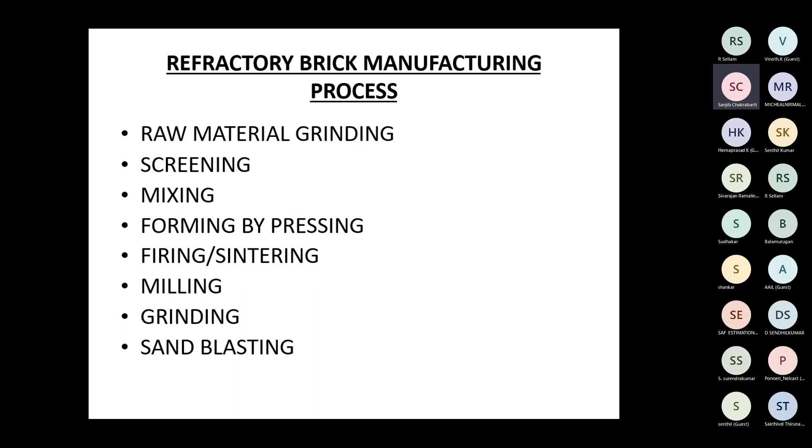Everything has a dimensional tolerance as per ASTM, the American Society for Testing and Materials. So you have to follow the guidelines of this ASTM. Milling means the surface has to be milled, machining. You can grind, and then sandblasting. These are very sophisticated. So these are the different processes and different machineries being used. A huge setup is there.

Now the quality tests. These are the abrasion resistance test, acid resistance test, air permeability test. These are all physical testing. Bulk density, apparent porosity, cold crushing strength, pyrometric, as I told you, pyrometric cone. These are all mechanical tests. Particle size detection, modulus of elasticity, modulus of rigidity, water absorption, size and dimension stability. Mind you, these are as per ASTM.